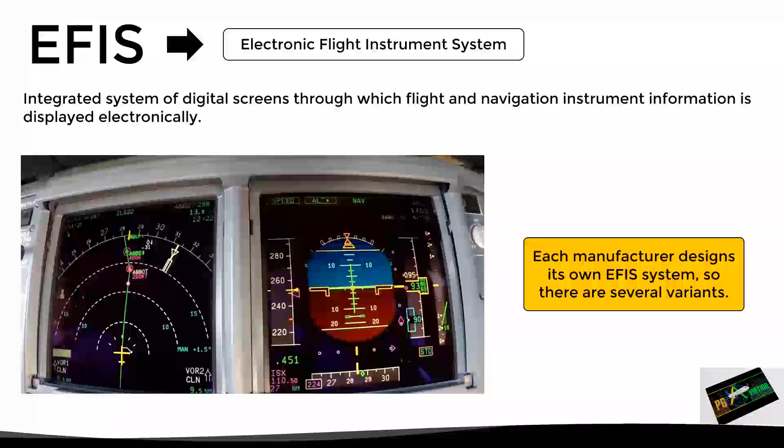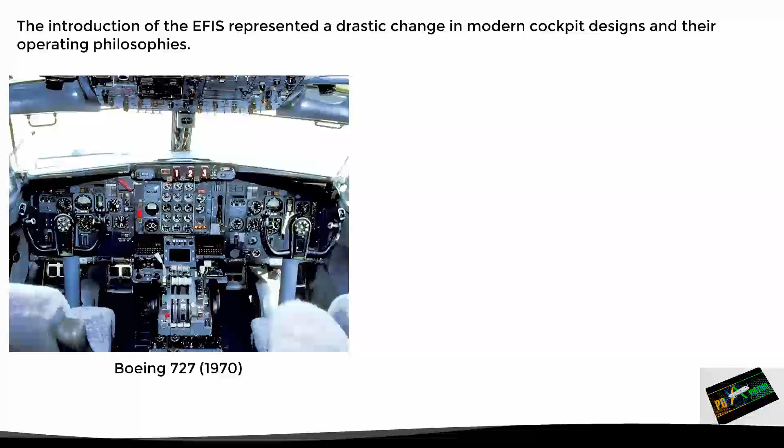The introduction of the EFIS represented a drastic change in modern cockpit designs and their operating philosophies. For example, in the image on the left, we can see the cockpit of a Boeing 727 designed in the 1970s, when EFIS systems did not yet exist. While in the image on the right, we can see the cockpit of a Boeing 787 Dreamliner from 2015, where we can clearly see the implementation of the EFIS in almost all instruments.

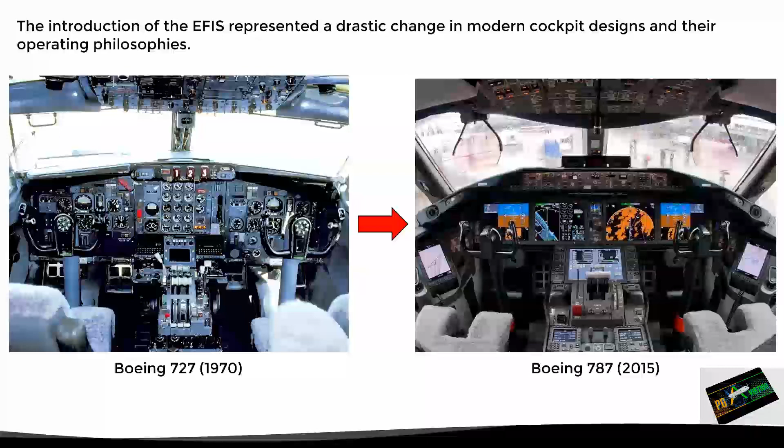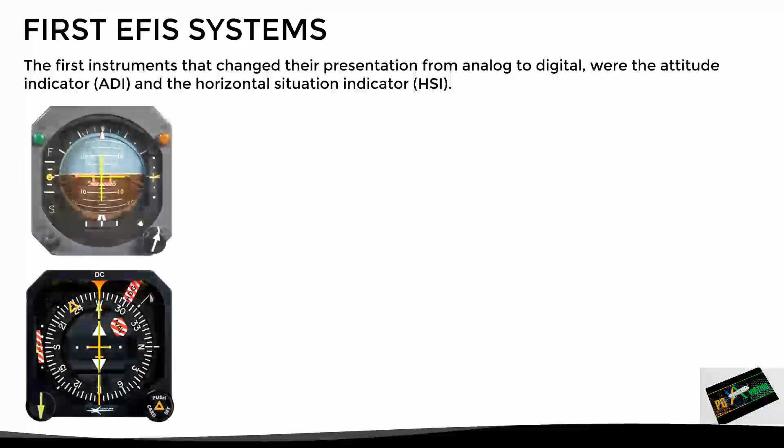This change did not happen abruptly from one day to the next, but occurred gradually. For example, in the first EFIS systems, the first instruments that changed their presentation from analog to digital were the attitude indicator and the horizontal situation indicator. These analog instruments were replaced by digital displays called Electronic Attitude Director Indicator and Electronic Horizontal Situation Indicator respectively.

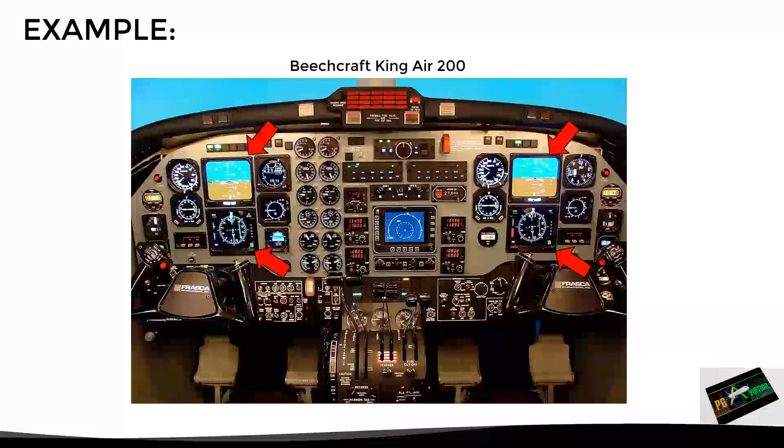Here we can see an example of the implementation of these first EFIS systems in a Beechcraft King Air. As we can see, both the attitude indicator and the HSI were replaced by digital displays, while the rest of the instruments are analog. Another example can be seen here with a Cessna 172, where again the attitude indicator and heading indicator were replaced by digital displays.

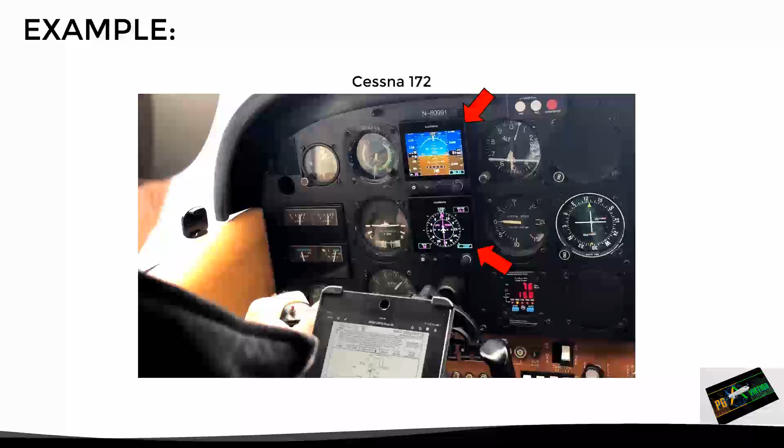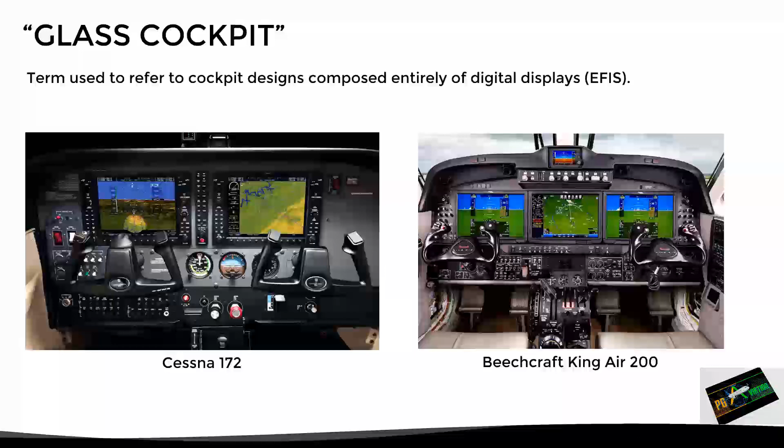So far we have seen the partial implementation of the EFIS system in the flight instruments. However, when we talk about a complete EFIS system, we use the term glass cockpit. This term refers to cockpit designs composed entirely of digital displays, as we can see in these images. On the left we have the Garmin G1000 system installed on a Cessna 172, while on the right side we have the ProLine 21 system installed on a Beechcraft King Air.

The components of a complete EFIS system are the displays that show the information to the crew, the control panel by means of which the system can be controlled, and one or more symbol generators. Let's now take a closer look at each of these components, starting with the displays.

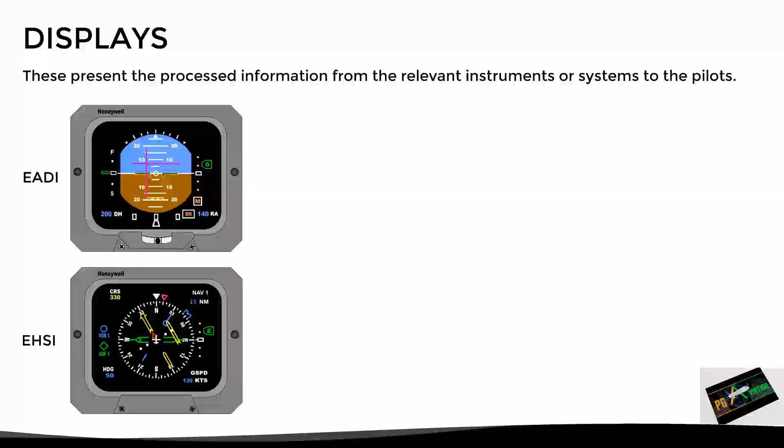These units present the processed information from the relevant instruments and systems to the pilots. We have already seen some of the displays used in partial implementations of the EFIS. However, in complete EFIS systems, other displays are used, which are known as PFD and MFD.

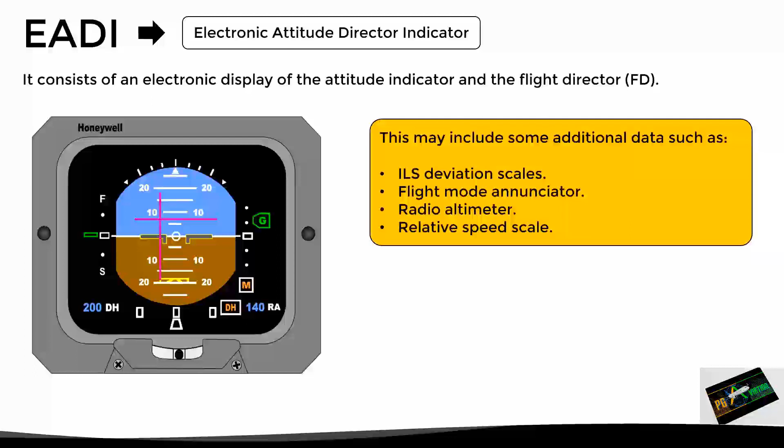Let's see a brief description of each of these displays and the information they provide, starting with the Electronic Attitude Director Indicator. It consists of an electronic display of the attitude indicator and the flight director. However, in some cases it may include some additional data, such as the ILS deviation scales, a flight mode annunciator, the radio altimeter, and a relative speed scale.

Although the design and presentation may vary slightly between models, this type of instrument does not include altitude, vertical speed, or indicated airspeed information.

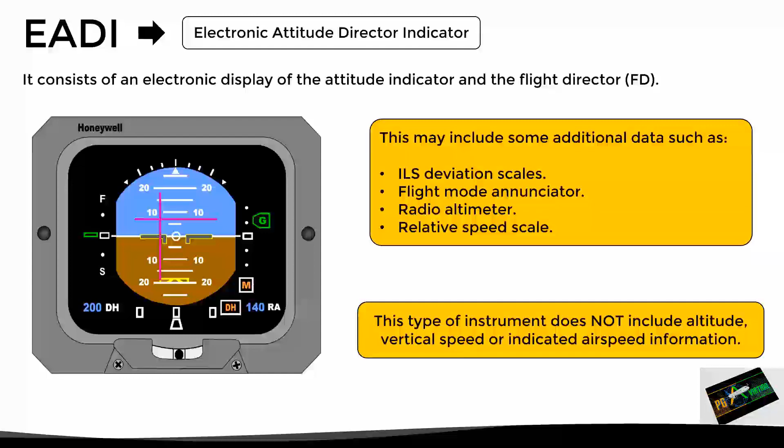With this being said, let's now look at the Electronic Horizontal Situation Indicator. As its name suggests, it consists of an electronic presentation of the HSI. However, it may include some additional functionalities such as ground speed, DME, RMI, and even a graphical representation of the flight plan. However, this type of instrument does not usually include advanced features such as weather radar or terrain.

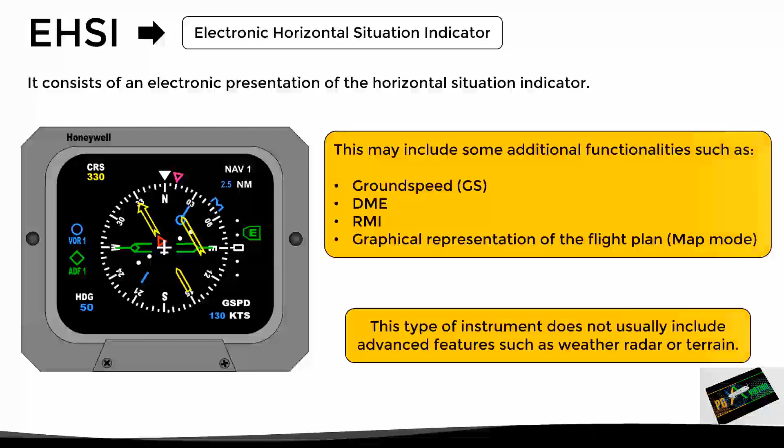Now, on complete EFIS systems, we have the PFD, which stands for Primary Flight Display. It consists of an electronic display that includes several instruments such as the attitude indicator, the altimeter, the airspeed indicator, the vertical speed indicator, the heading indicator, and the slip and skid indicator.

In addition to this, it may include some additional data such as the ILS deviation scales, a flight mode annunciator, a radio altimeter, and the frequencies for navigation and communication. So as we can see, this display condenses the 6 basic flight instruments into a single presentation, which results pretty convenient for the pilots, and that is why it is called Primary Flight Display.

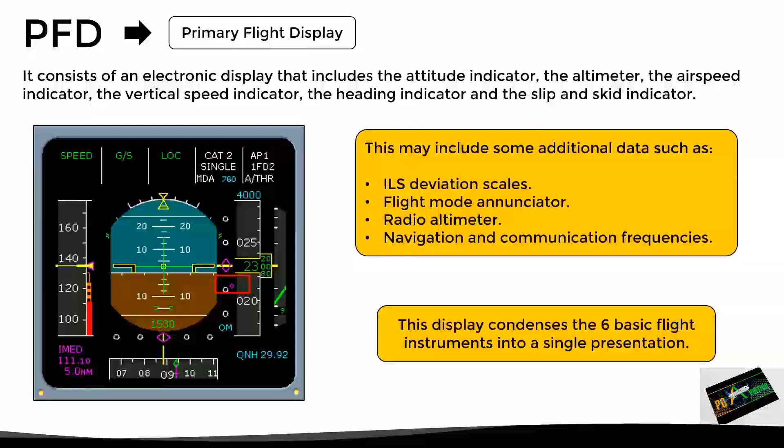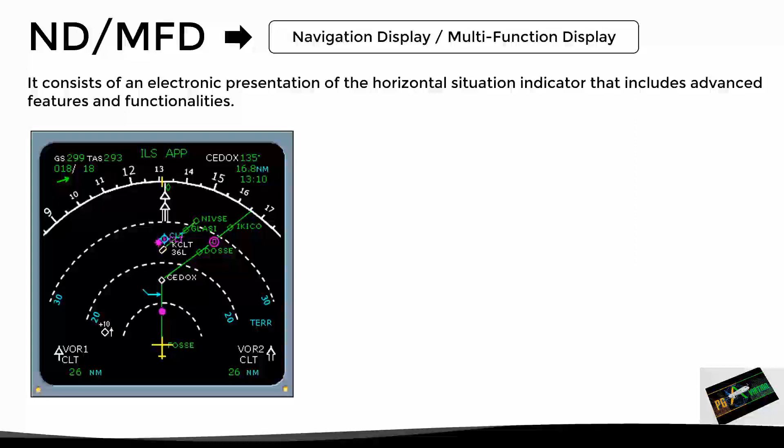Finally, we have the MFD, which stands for Multifunction Display. However, depending on the manufacturer, it may also be called Navigation Display, abbreviated as ND. It consists of an electronic presentation of the Horizontal Situation Indicator that includes advanced features and functionalities related to navigation, such as true airspeed and ground speed indication, wind direction and speed, DME, RMI, a graphical representation of the flight plan, weather radar, and terrain.

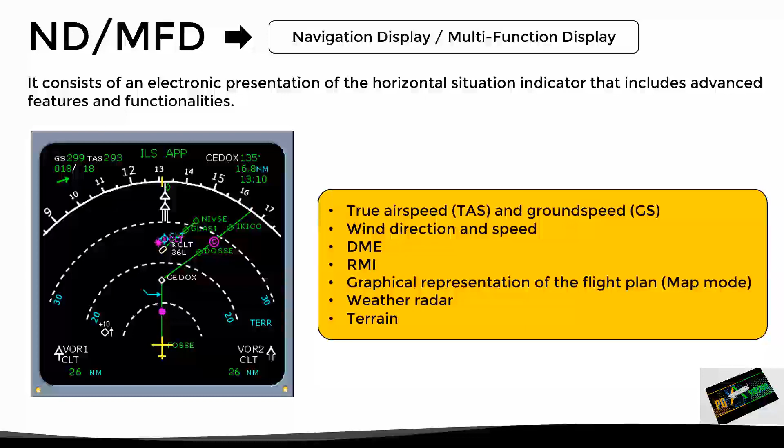Now, in larger and more complex aircraft, we can find displays such as the ECAM or the EICAS, which are dedicated displays for monitoring and indicating engine parameters and other aircraft systems.

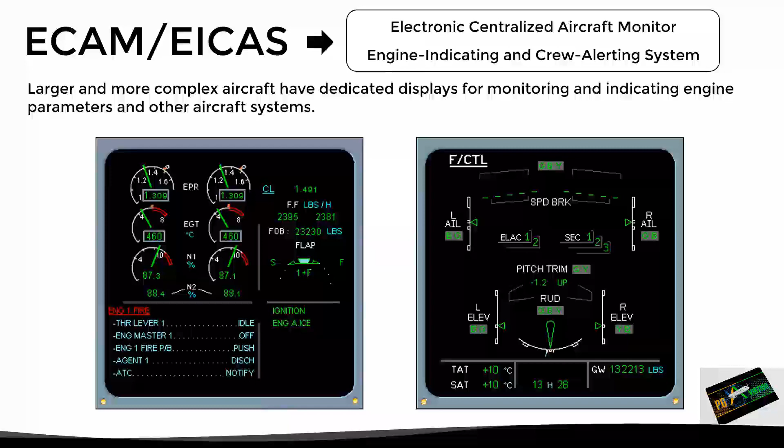The technology used in the displays of the first EFIS systems consisted of cathode ray tubes. However, today most EFIS systems are equipped with liquid crystal displays, which are much more efficient and reliable.

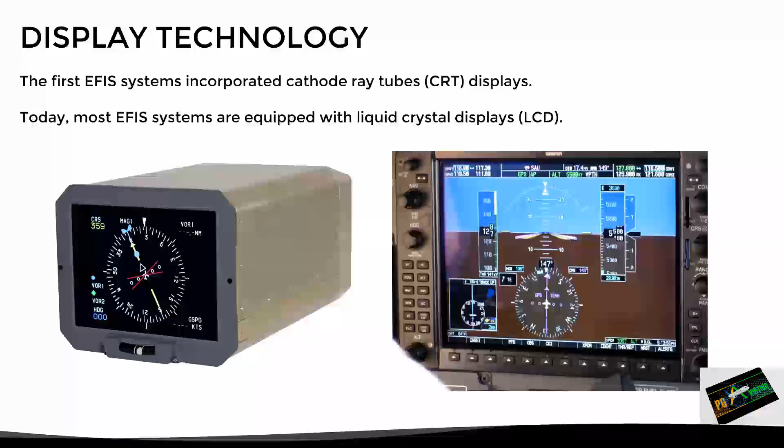Another important change caused by the introduction of the EFIS system is the way information is presented to pilots, since the great flexibility offered by digital instruments compared to analog instruments has made it possible to redesign how information is presented. This way, digital instruments are easier to read, present less ambiguity, the information is more accurate, and they have intuitive, simple and clean designs.

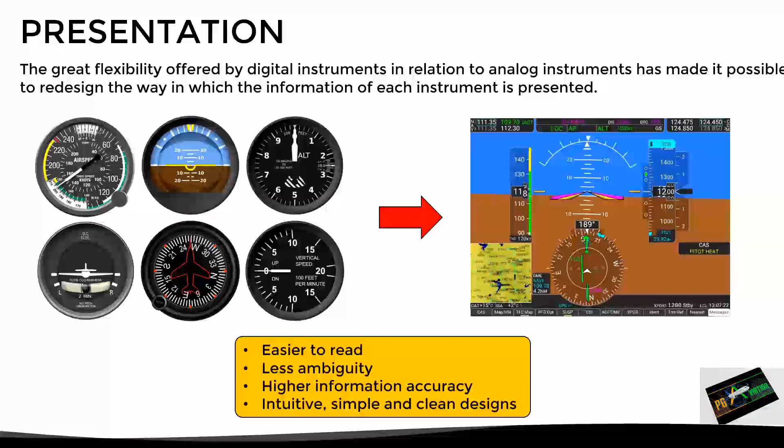With this being said, let's now look at the control panel. This unit allows the crew to control the information displayed on the EFIS's displays, as well as the brightness. However, as previously mentioned, the design and functionalities of this control panel vary depending on the manufacturer and model, so it is important to be familiar with the control panel to be operated.

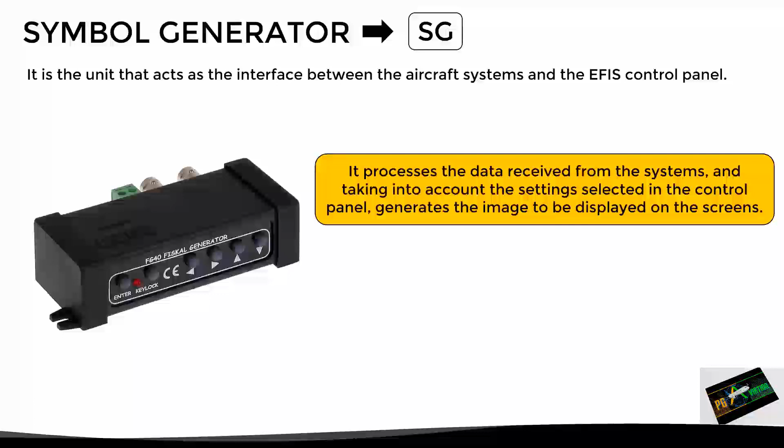Now let's see the last component of the system, which is the symbol generator, abbreviated as SG. This unit acts as the interface between the aircraft systems, the EFIS's control panel, and the displays. In other words, it processes the data received from the systems, and taking into account the settings selected in the control panel, it generates the image to be displayed on the screens. This symbol generator may be known by other names, such as display management computer, display processing computer, display electronics unit, among others. Let's see an example of how this unit works.

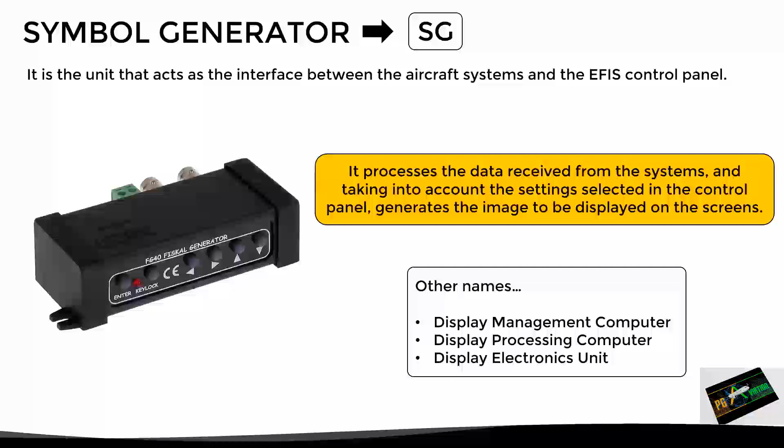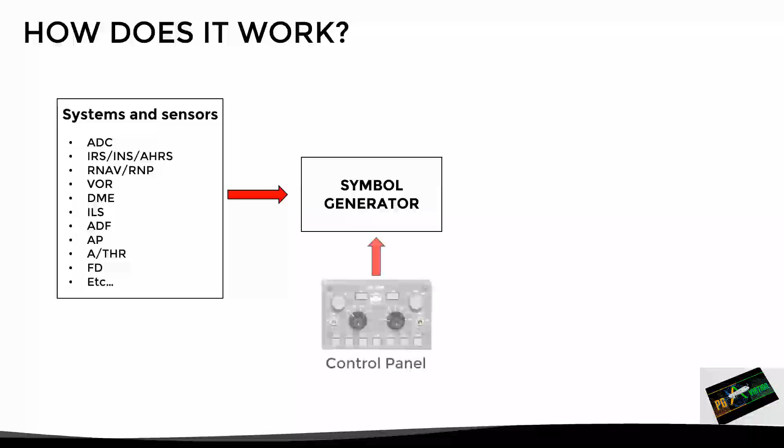Initially, the symbol generator receives information from the aircraft systems and sensors, which provide all the information that must be displayed to the flight crew. Then, the unit takes into account the settings selected in the control panel to generate the image to be displayed on each screen.

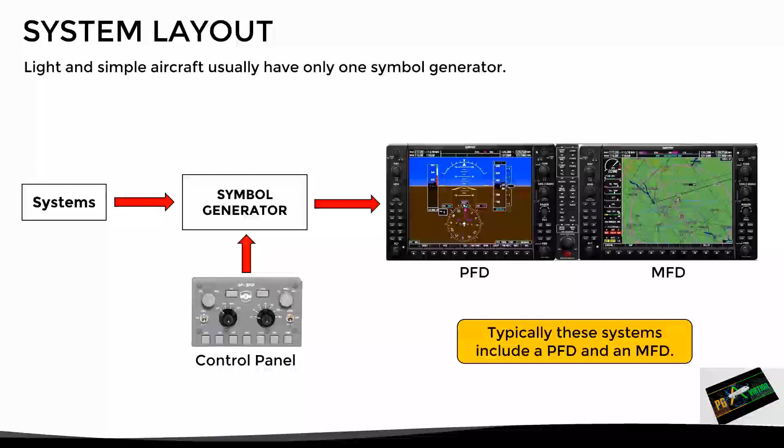Regarding the system layout, light and simple aircraft usually have only one symbol generator, since typically these systems include only one PFD and one MFD. However, larger and more complex aircraft usually have up to 3 symbol generators.

In this case, under normal conditions, the captain's sensors will provide information to symbol generator number 1, which will generate the images for the captain's displays. On the other hand, the first officer's sensors will provide information to symbol generator number 2, which will generate the images for the first officer's displays.

In addition, both the pilot and co-pilot sensors will send information to symbol generator number 3, which will be the backup unit. This way, the backup symbol generator will be able to generate the images for any of the displays.

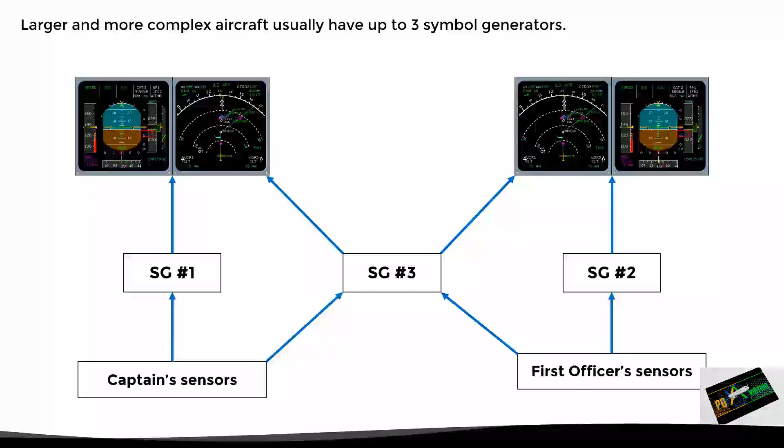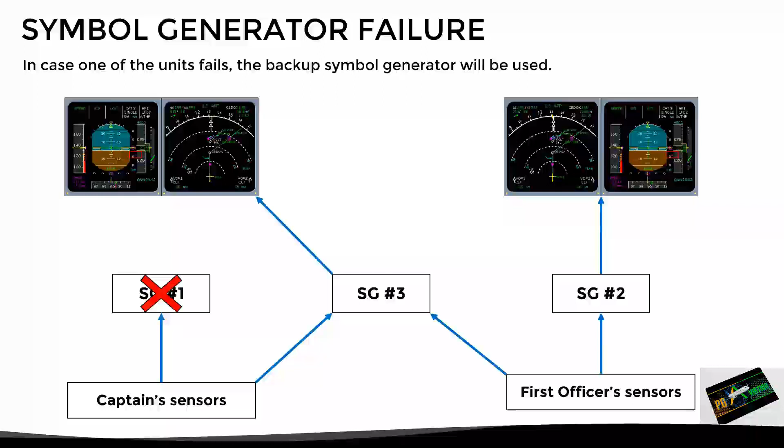With this in mind, if one of the units fails, the backup symbol generator will be used to provide information to the affected displays. In this example, symbol generator number 1 failed, so unit number 3 is now feeding the captain's displays. In some cases, the pilot can even manually select the symbol generator to be used for a certain display. However, the operation of this system varies depending on the manufacturer and model.

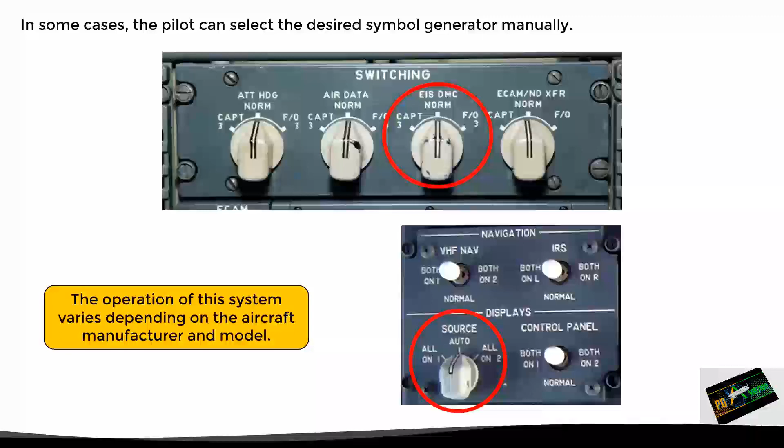So far we have seen what happens in case of a symbol generator failure. Let's now see what happens if one of the displays fails. In this case, the pilot can select to have the information displayed on another screen. However, once again, the operation of this system varies depending on the manufacturer and model.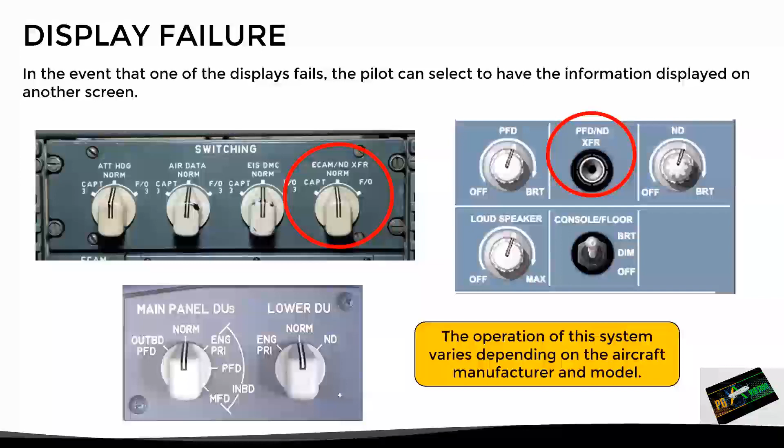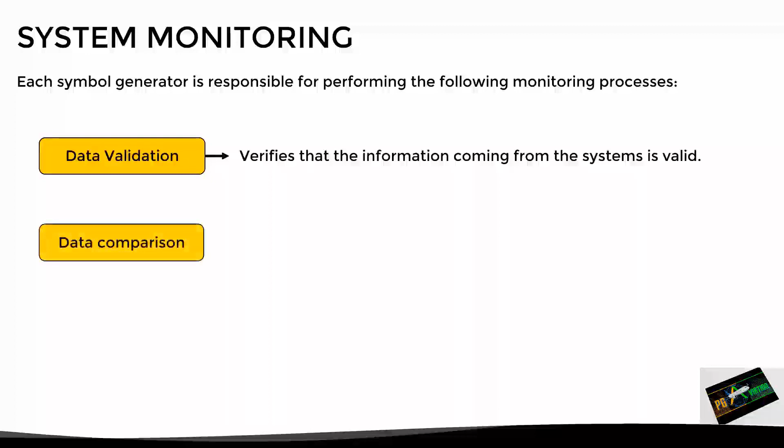Now, the symbol generators not only process the information, but also monitor the system. Each symbol generator is responsible for performing the following monitoring processes: data validation, which verifies that the information coming from the systems and sensors is valid; data comparison, which compares the data processed by the unit with that of the other symbol generators; and display monitoring, which monitors the integrity and performance of each display.